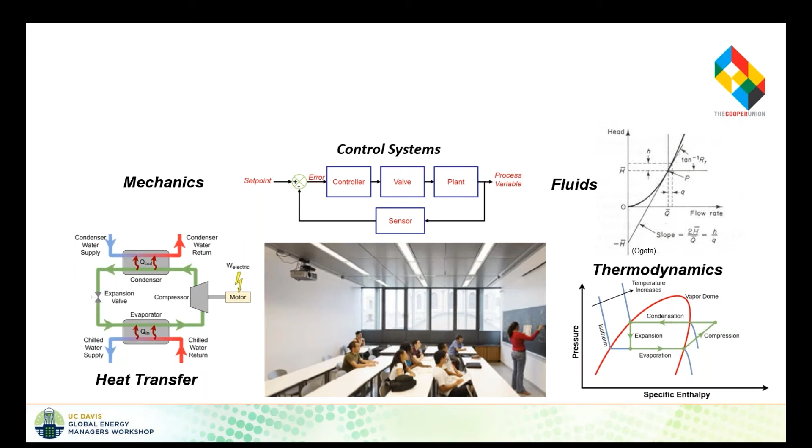I'm a professor in mechanical engineering, and our students take courses in control systems, mechanics, heat transfer, fluids, and thermodynamics, but many of them never actually physically see the hardware they learn about and write equations for. A goal for me was that students need to see the real world application of the theory they learn—for example, they study the thermodynamic refrigeration cycle, but they've never actually seen a compressor or an evaporator and know what that physically looks like.

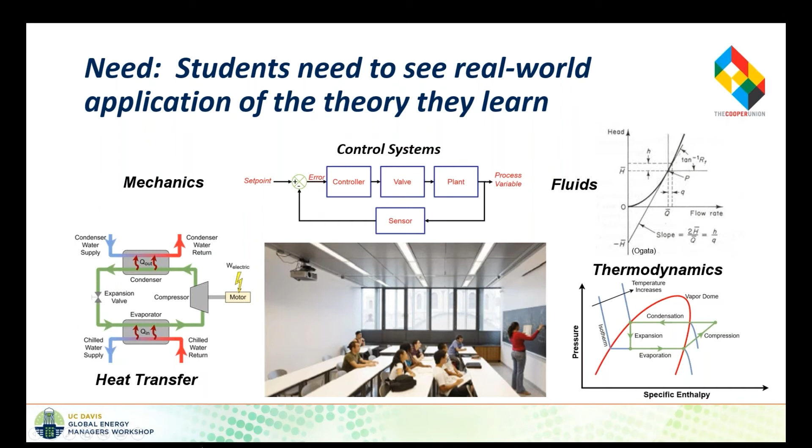So when we moved into our new academic building at 41 Cooper Square, which was LEED Platinum certified in 2009 and has many state-of-the-art features, it was an opportunity to use these systems—the building automation system, all the MEP systems—to facilitate real-world, hands-on project learning.

In 2012, I was awarded a National Science Foundation Transforming Undergraduate Education in STEM grant, a TUES grant, to leverage the building as a learning laboratory and to develop new hands-on process control lab experiments. Here you can see some pictures of some of the elements of the new hands-on components that are being integrated into the curriculum.

First off, the core of the project was to create a new required process control lab course that revolves around a building systems theme. In this course, students start off on benchtop rigs with actual shell and tube heat exchangers, radiator, some heating elements and sensors, and a liquid level flow experimental rig. They do actual liquid level flow temperature control experiments.

Then a content website was developed in which students can learn about background materials related to all the different systems in the building. It's divided by central plant, some of the zones such as radiant heating, some of the special features such as cogen and rainwater harvesting, for example. Students also developed a real-time interface so that you could see real-time energy and historical building performance.

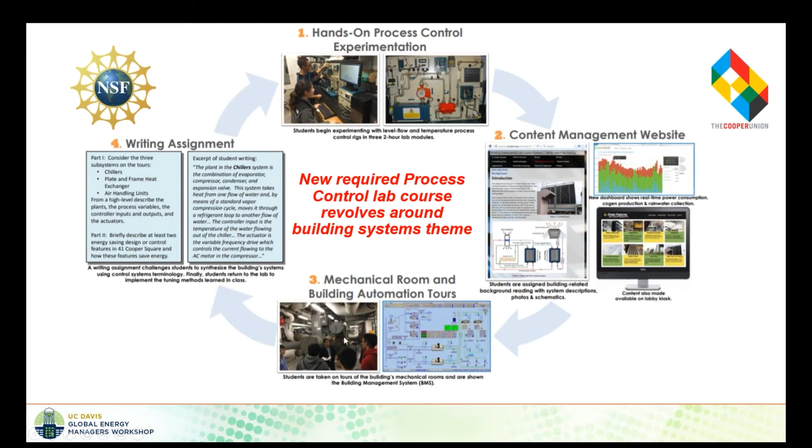But in the process of learning about the building in order to teach how the building worked, we also learned how complex it is. There's many different zones. There's laboratories that have fume hoods that were often left open. There's exhaust fans, and in some ways many of the labs - for example, I'm a mechanical engineering professor, so there are no chemicals in my lab, but the architects designed my labs to have excessive ventilation as opposed to the chemical or wet labs where there's actually a need for extra ventilation.

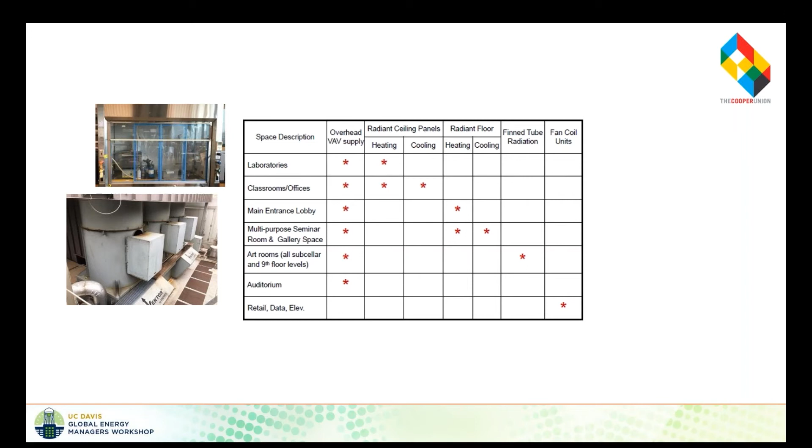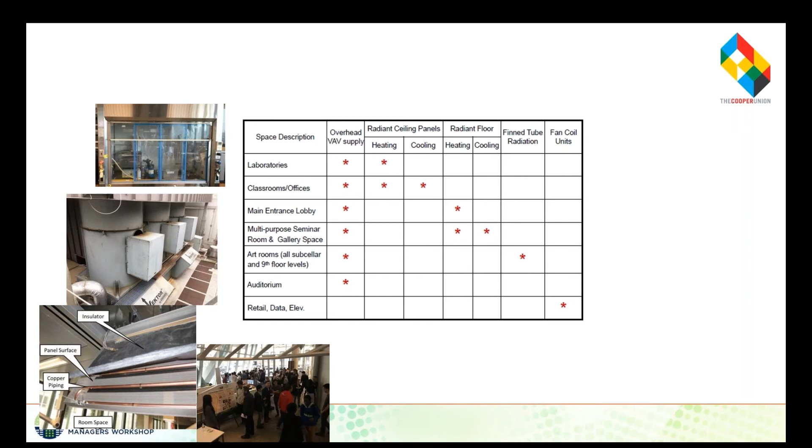So that's something we learned that was probably causing the building to consume too much energy than it really needed to. We have radiant panels with three-way valves, and using the air side before we use the radiant panels was one of the things that we found, and that wasn't necessarily energy efficient.

There's radiant flooring, and a cascading air system. All the classrooms and offices are 100% dedicated outside air units, but there's a cascading atrium that takes air from the atrium, takes corridor air, and uses it as return air for the air handlers that provide air to the laboratories. That had a complicated control system because there were 2 plenums that were shared, or 2 air handlers that shared 1 plenum, and that made the control system really complicated.

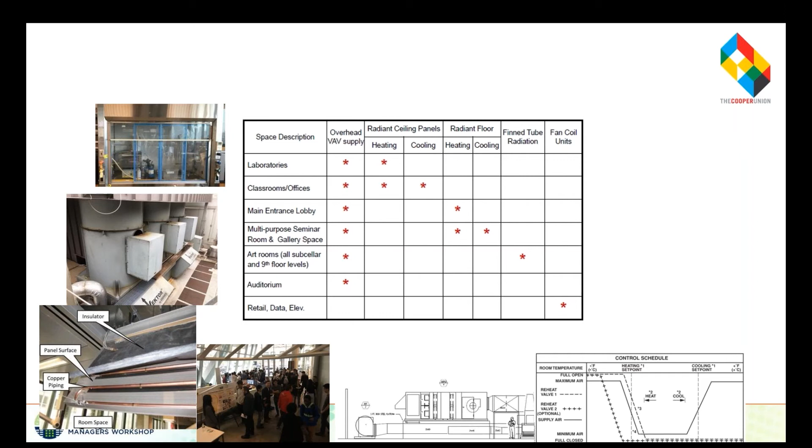Again, different terminal end units and different controls, and the building management system didn't necessarily have all the control parameters displayed in a clear way for the operator. So for example, in one instance, they didn't know that the output, presented as a percent valve position or damper position, was actually a state variable that told you whether or not the controller could only output whether the damper was opening or closing, or closed or open all the way and not moving. So the operators were misinterpreting the information from the building management system.

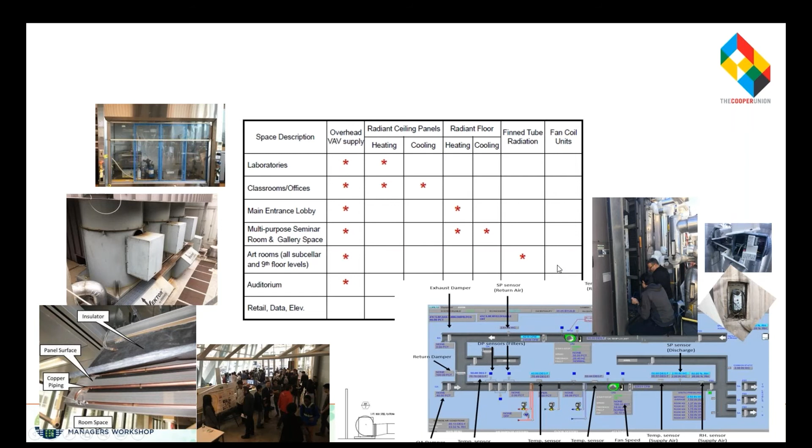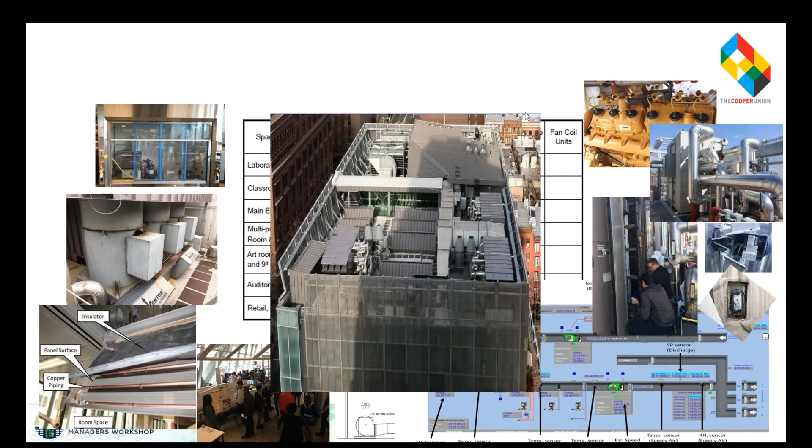So in essence, the point I'm trying to get at is that in the process of learning about the building, we also learned about its complexity and that it was also ripe for retuning. Many actuators were failing, probably too many actuators in too many zones, for example. We had a cogeneration system that was plagued with problems - the absorber constantly failed and didn't work properly. With all these different systems in the building, from the time we moved in, the first 5 years - which I've read is very typical for a LEED Platinum building - the energy actually increased.

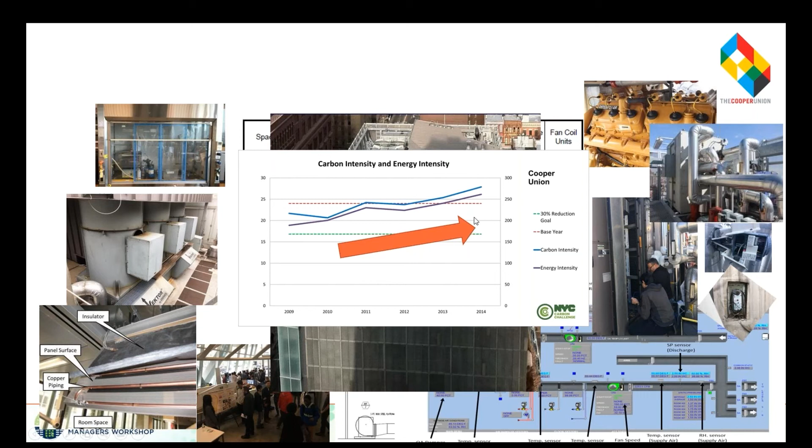The moral of this is that we found there was a need to apply fundamentals and a systematic approach to achieve and maintain efficient operations. As many of you who are facilities energy managers know, staff on the ground are often just answering calls. If someone's complaining that a room's too hot or too cold, they're just attacking those fires, and when they finally have a chance to figure out what to do, they're overwhelmed by these complex systems and where to focus their efforts and energy.

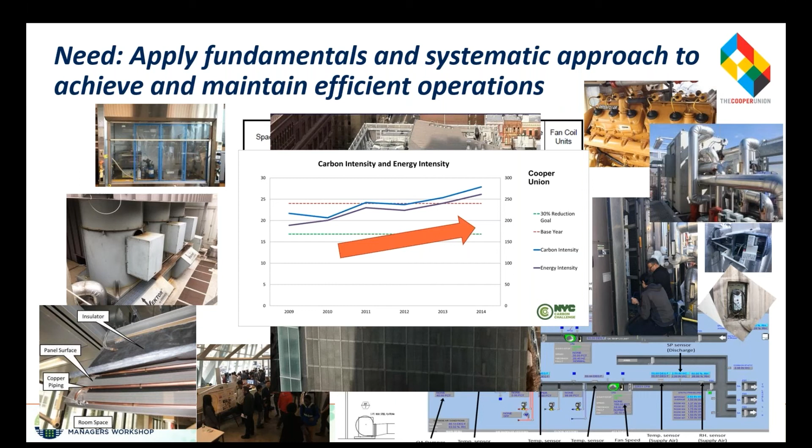That's where I think having students looking at the data and doing project-based learning, such as Devon mentioned, static pressure resets and being able to look at the damper positions, comes in. So they're simultaneously learning, but also really making a difference in their environment and helping our staff.

So that's where we started to engage the students that took the required course, learned about what I was doing, and a handful of them would go on to engage further, such as student interns in their capstone senior design projects and master's research. We developed a new energy efficient building systems course co-taught by an energy consultant, and you can see students actually out in the field getting data, developing dashboards for the staff so they could see the problems and make improvements.

Creating data historians, energy dashboards, and reporting tools, analyzing and optimizing the building systems and controls, and contributing to building science research. If you want to learn more about these projects, I'll share a link to my website at the end of this, which has detail about some of these projects.

A goal was that our students would enter the workforce with industry relevant skills, because they're actually doing work that was industry relevant on our building.

So these are just some example projects, including looking at our double skin facade and how much energy it actually saves by doing computational fluid dynamics modeling, also related to being able to change the air change rates in the lab to exhaust a hypothetical acetone spill, to see if we could reduce the air changes.

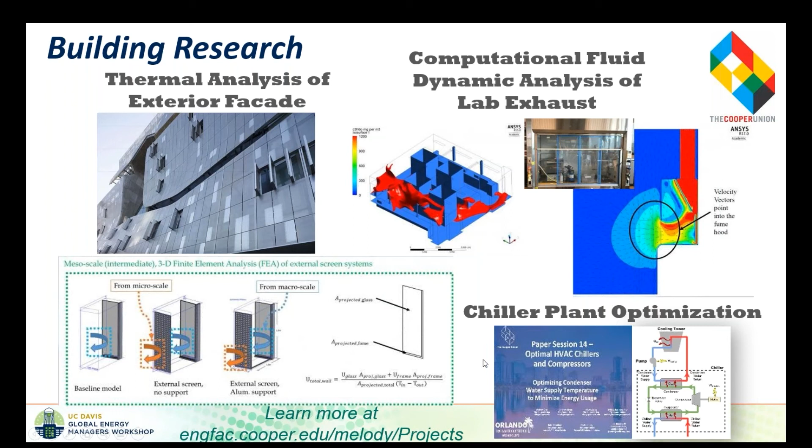But we got some funding, through not only National Science Foundation, but NYSERDA, which is the New York State Energy Research and Development Authority. Through the funding from NYSERDA, it supported us hiring Schmidt Engineering as an energy consultant to help us develop a roadmap to achieve our 40% carbon reduction by 2030 target.

It also helped us divorce the data analysis from the building management system onto a separate OSI Pi server and start doing energy and analytics, and the students are building dashboards to be able to alert the staff to problems, because as the data was being presented in the building management system, it really didn't highlight areas of concern in an intuitive way.

We also have funding to develop site-specific training for our facility staff and curriculum, and to implement best practices and optimization, in addition to this new energy efficient building systems course that's being co-taught.

And the outcome is this: since 2014, when we really started engaging in these projects, our carbon has gone down. We still have a long way to go to our 40% reduction target, but we've made progress and we're continuing to make progress. In summary, since 2014, we've had 2,500 tons of CO2 saved.

We saved $1.4 million in energy. We have 3 buildings on our campus, so that includes all 3 buildings. 10 facility staff have been trained. We've had publications in ASHRAE and ASME and others, master's thesis related to the building, poster presentations at 10 different conferences, and capstone senior design projects.

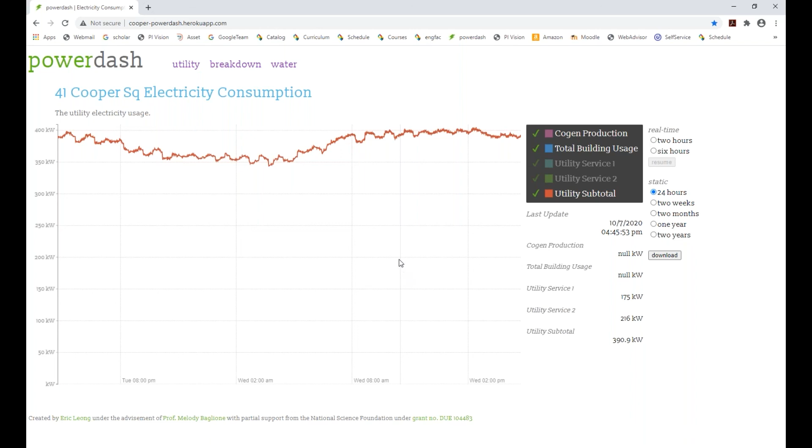So there's very little turning things off at night in our building, and it's difficult to get people to understand that. We have a much different climate than you do too. We're heating and cooling buildings almost every single day of the entire year.

But that dashboard was created by students, by the way.

So did anybody have great ideas, like wouldn't it be great if I could work with facilities as an educator, or if I'm at a school with a department and faculty that does this? One of the goals of this session was to inspire more project-based learning.

I've heard there's one about comparing data trends to network use. I think that's an opportunity. Really, facilities and IT are kind of separate, and I don't know if your institution is the same way, but there's an opportunity to use the information they have more.

I'm going to cut and paste some of these things. Partnering with labs on green labs, making good progress. That's great. And there's a term out there I'm not familiar with.